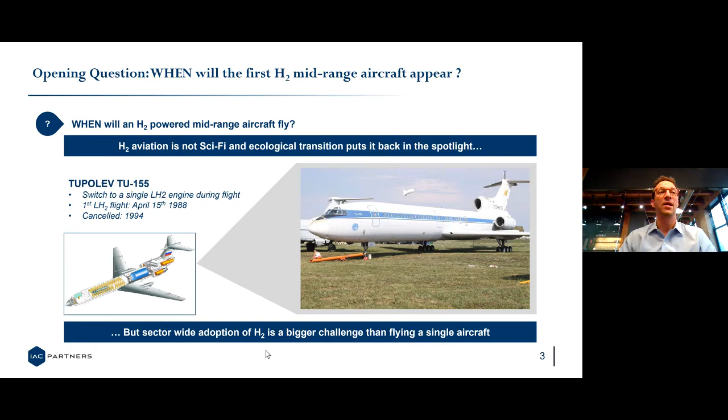Second category, you've got the e-fuels or synthesized kerosene. Pretty interesting technologies, because it has exactly the same characteristics as the current kerosene. So you don't need to modify the aircraft or the engine to run a commercial aircraft with synthesized kerosene or e-fuels. It's made out of carbon and hydrogen produced via electrolysis, and you also need some energy to manufacture these e-fuels. The only drawback is the very high cost to produce these e-fuels. Currently, it's estimated at around 10 times the cost of production for kerosene. It's already approved by the FAA, so that's a really promising thing, and they can use it up to 50% as a propellant.

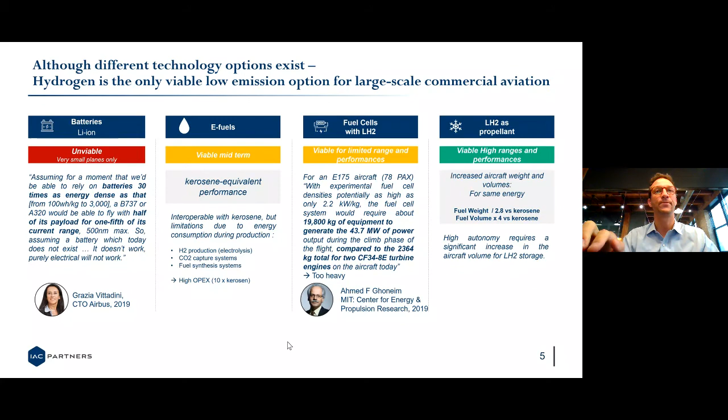First, grid balance. Grid balance, the principle here is that you use hydrogen to store the energy produced by a source of energy. Could be, for example, wind turbines. And depending on the need, for example, during a peak in consumption or during the night, you will re-inject this energy into the grid to provide electricity to the network. So it's already existing. It's already in place. It's at a good maturity level.

So according to us, in the short to mid-term, so 2025 to 2030, despite its more expensive cost of production, we could see some aircraft operating with e-fuels. Lufthansa, for example, has already started in Hamburg to prepare to operate some aircraft with this kind of e-fuel, and it's a promising one if the production is done in a green way, meaning that the carbon is captured from the air to produce these e-fuels. So it could be greener, and operating with hydrogen.

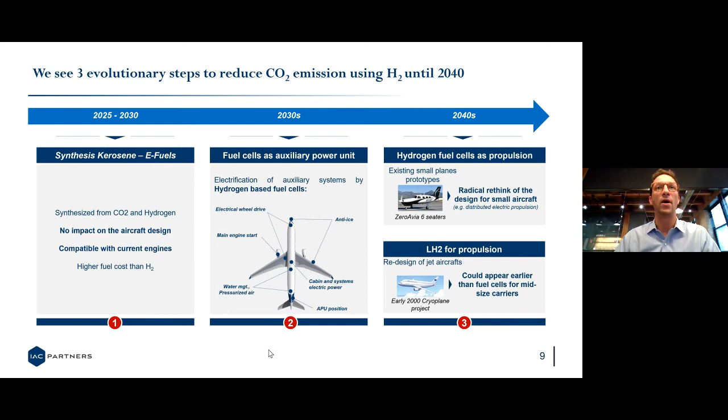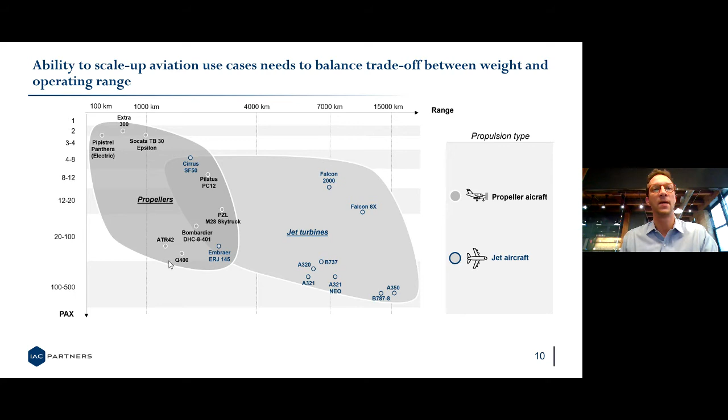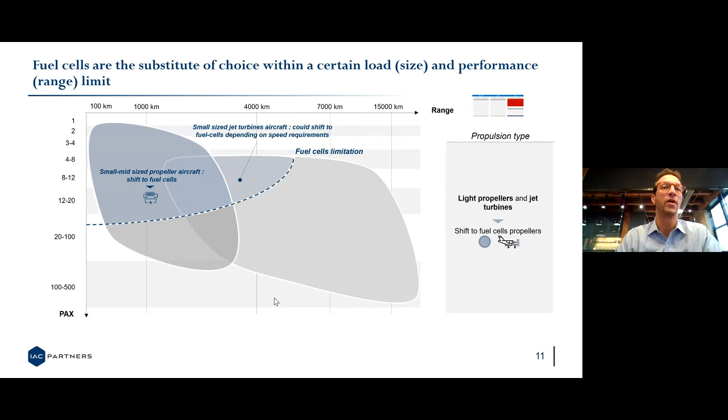So considering the fuel cells as a greener means to propel some aircraft, the application of these fuel cells is limited by two major factors. You have this weight penalty that we've talked about, which will prevent commercial aviation from using it on planes bigger than 20 passengers, more or less. And also the limitation on the speed of the plane due to the propeller, which impacts a lot the operating range possible using fuel cells.

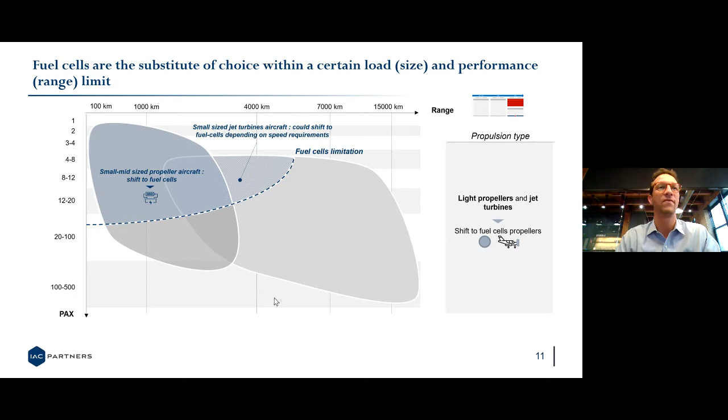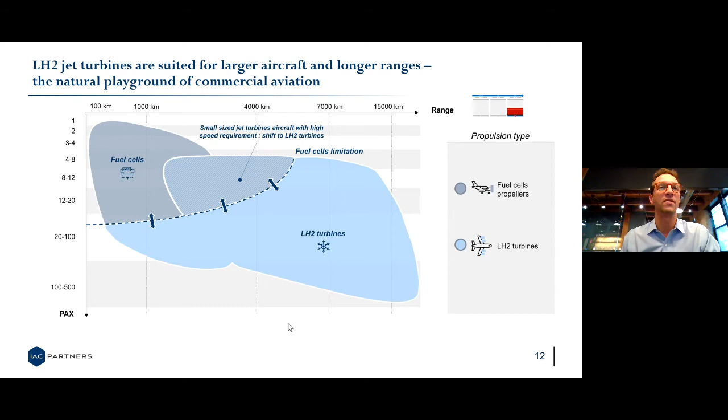And then, depending on these speed requirements, there is this striped area where there is a trade-off to be made: whether fuel cells are viable, or whether we clearly have to use liquid hydrogen to cover this area. Liquid hydrogen, once again, is seen by us as the unique viable solution for commercial aviation with a long operating range and aircraft as big as we see today. There's a frontier that is moving, of course, and it depends on the speed requirements to be able to operate on the long range. And it's the only technology we see as able to offset the weight or volume ratio of current kerosene and fuel cells.

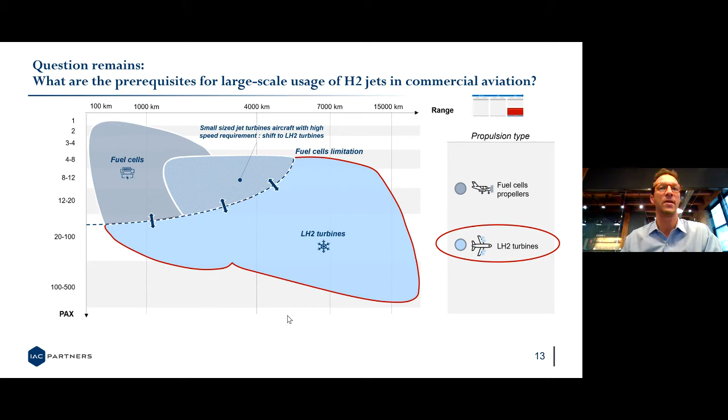So let's have a look at the different prerequisites for a large-scale rollout of hydrogen aviation. Four main challenges for large-scale hydrogen aviation. You have in mind so far that the aircraft quite logically need to be redesigned so that they are compatible and compliant with the usage of hydrogen. Of course, a lot of systems need to be developed. The aircraft will need to be certified to fly with hydrogen. A lot of challenges, but there are three other ones.

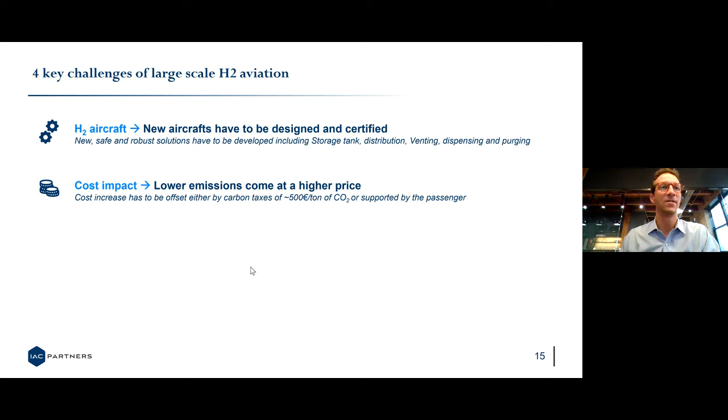The following one being the cost impact. We'll see that to get lower carbon emissions, you need more money to produce the hydrogen. So there's a challenge to overcome here. Electricity production. If we put ourselves in the scenario of a large-scale rollout of hydrogen aviation, we would need to produce a big amount of electricity to run the electrolysis necessary for the production of hydrogen. And if we want to fully hydrogenize commercial aviation, we would need to increase global electricity production by 35%. So that's a major move. We'll see what it represents. Hundreds of nuclear plants, of course.

Last challenge, the supply chain. Even if you are able to produce the required amount of electricity, which is technically doable, you would need to store this energy and deliver this hydrogen to all the aerospace infrastructure all over the world. So we're talking about roughly 40,000 airports all around the world. And switching from kerosene to hydrogen will take time. It's not a small move. It's not happening overnight. So a lot of challenges to overcome. Let's deep dive.

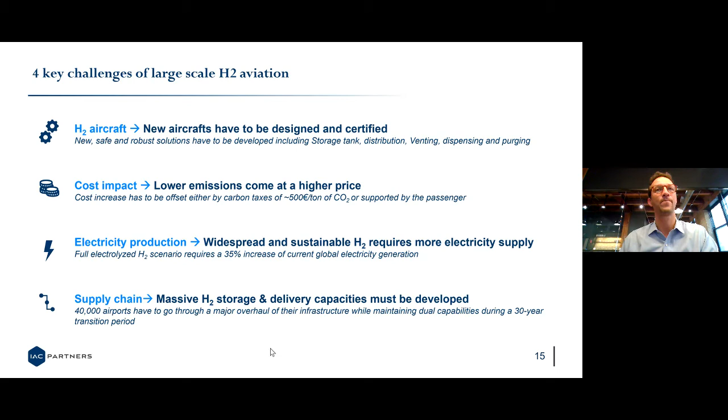So the first challenge is to make the aircraft compatible, let's say, with the use of hydrogen as a propellant. So a lot of impacts on various systems, on the engine, on the frame of the aircraft, various valves, and management of the propellant. And one major change that you see with the color pink and blue on the aircraft.

Currently, we store the kerosene in the wings of an aircraft, but due to the ideal shape, which is cylindrical, to store the hydrogen, we would need to put it somewhere else than in the wings. It's not possible to have these cylindrical hydrogen tanks in the wings. So the main concepts so far are with the tanks of hydrogen on top of the passenger cabins, so that it evaporates above the plane.

So a major change in terms of design. A lot of work to validate and to get a good maturity level on this change and get a certified plane ready.

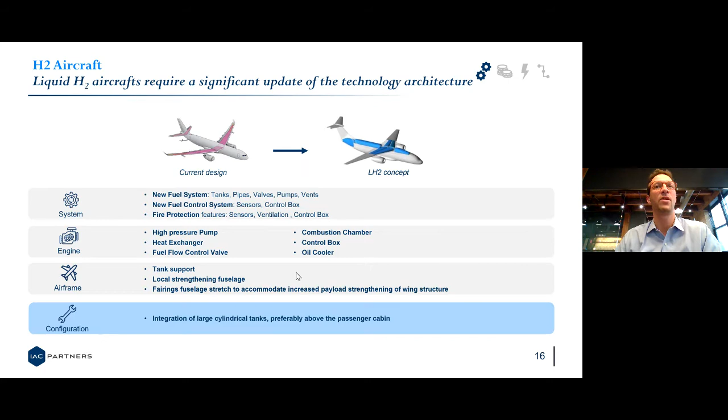Next challenge, the cost. We want to use hydrogen to reduce the carbon emission. There are three different ways to produce hydrogen and three different kinds of hydrogen. The thermochemical conversion, the oldest one. With this one, you can produce what is commonly called gray hydrogen, the one used by the petrochemical industry. It's made out of fossil fuels, so clearly it's not green in the sense that it emits a lot of carbon in the air. And then lately, two other kinds of hydrogen appeared, the blue hydrogen and the green hydrogen.

The green hydrogen is clearly the target. It is made out of electrolysis, and the energy is provided by renewable sources. So it's clearly the greener one, that's the target, biochemical conversion production means. And in between gray and green, you have the blue one with two subcategories: the grayish one, which is fossil fuels with a carbon capture and storage system, and a greener one, which is like the green one, made out of electrolysis, but with the energy coming from the grid and not renewable sources.

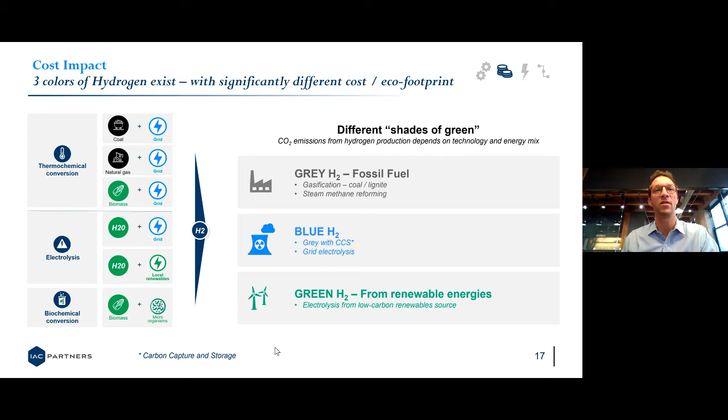So we'll see in the next page the different impact on carbon emission and the different cost impact of these three kinds of hydrogen. So on this graph, the gray bar represents the amount of carbon emitted to bring to the plane a certain amount of energy. From well to wheel, you can say it this way. So the baseline is kerosene, clearly. On the left side, currently you emit 12 kilograms of CO2 to bring a certain amount of energy to the aircraft.

And quite funnily, we already see that the gray hydrogen is not greener. It emits more carbon than the current kerosene, and it has a ticket cost increase of about 8% in comparison with the current kerosene. So the production cost is higher and it pollutes more. So not the future, clearly.

And on the right side of the screen, you have the green hydrogen, the target, with very little carbon emission, but a big disadvantage is the current production cost is 20% higher. So one of the challenges is clearly to find the ways and the levers to offset and reduce this cost impact so that it's not supported by the passenger on the ticket price.

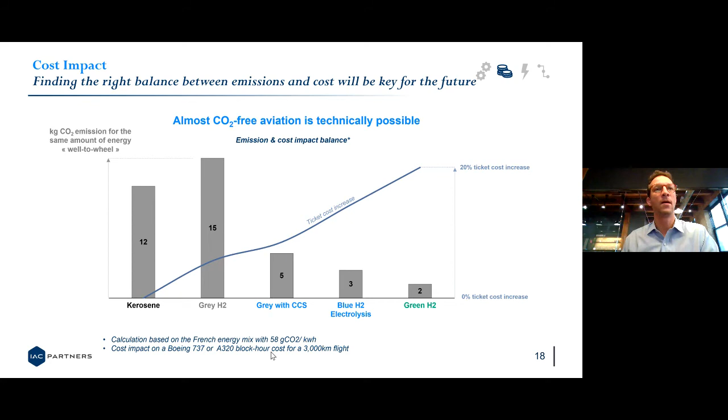Following challenge, electricity production. We mentioned earlier that to switch commercial aviation completely to hydrogen, we would need a 35% increase in electricity production. To illustrate that, we took the assumption that Atlanta Airport, one of the biggest airports in the world, with 1,200 takeoffs a day, switched to hydrogen aviation. Currently, you need 7,200 tons of kerosene per day for Atlanta Airport. The equivalent amount of hydrogen would be 2,600 tons per day. And to produce these 2,600 tons of hydrogen, you need 6.5 gigawatts of energy.

What does this 6.5 gigawatts represent? If we consider nuclear technology, we talk about 4 nuclear plants of 1.65 gigawatts, knowing the timeline, the difficulty and the big investment. We talk about a $4 billion investment to get a nuclear plant, an EPR reactor. And that's only for Atlanta Airport, so it's a big move.

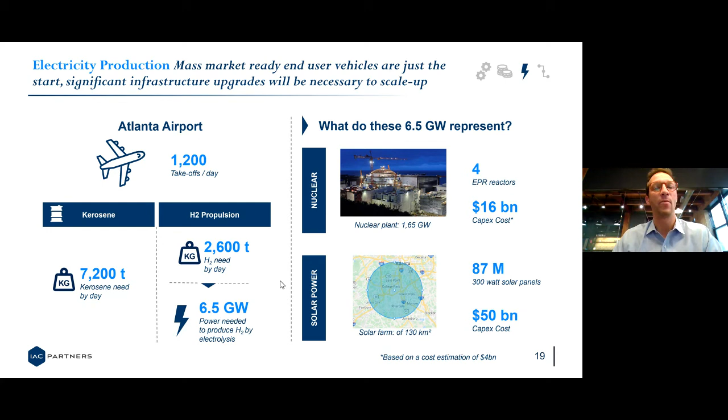If you're interested, we've established the different cost models for this supply chain, depending on the use case you target, so the advantages and the cost impact, of course. All the players of energy are trying to position themselves on this supply chain, and they all have very different views on where the value is and where they should be positioned to capture as much value as possible and generate as much revenue as possible. And depending on their activity, their business, it could be a defensive move.